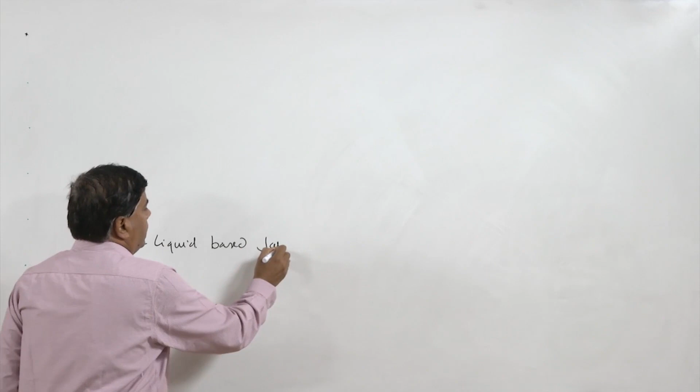In this presentation, I will be talking about basically the two solid liquid based joining processes. These are commonly known as soldering and brazing.

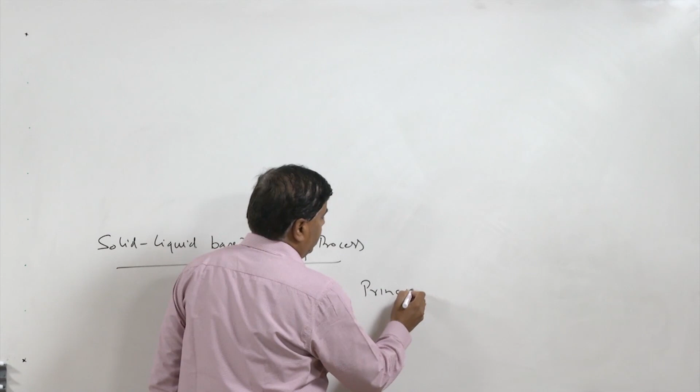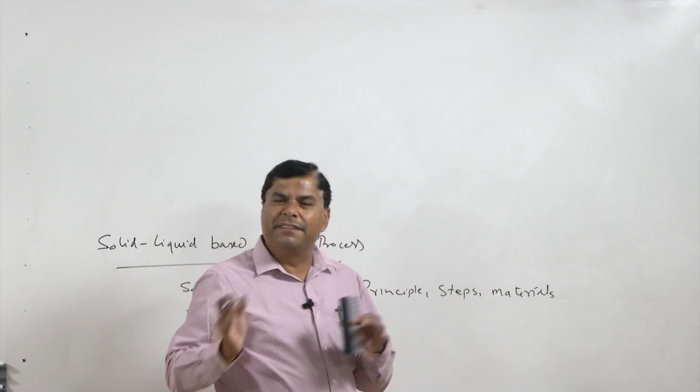Related with these two processes, we will be talking about the basic principle of these processes, steps, the materials which are used like the fillers and the fluxes, thereafter comparison between the two like soldering and brazing, and along with the application of the two processes.

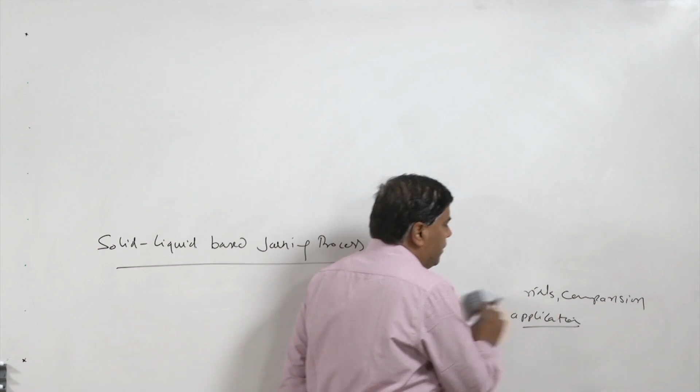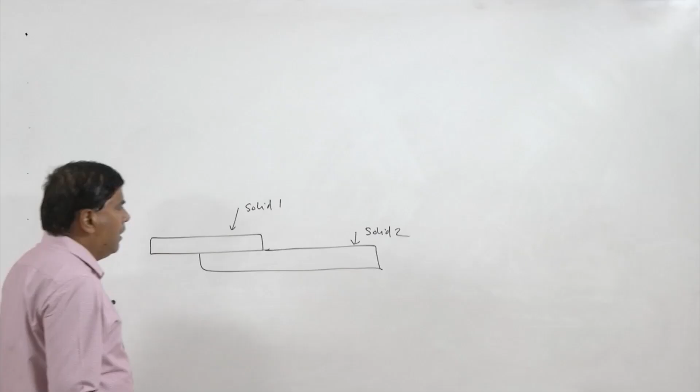As the name suggests, these processes fall in the category of solid liquid based joining processes. Why are these called so? Because the base metals to be joined are kept in solid state, meaning they remain in solid state like solid 1 and solid 2, while the material used for developing the joint between these two is brought to the molten state, which is called either braze material or solder, depending on the kind of process used. So, brazing material or the solder, that is why.

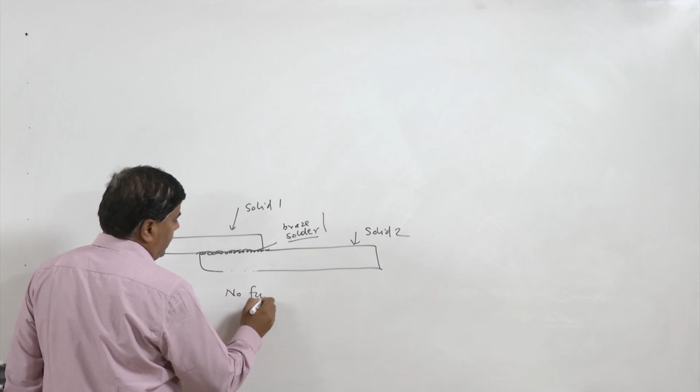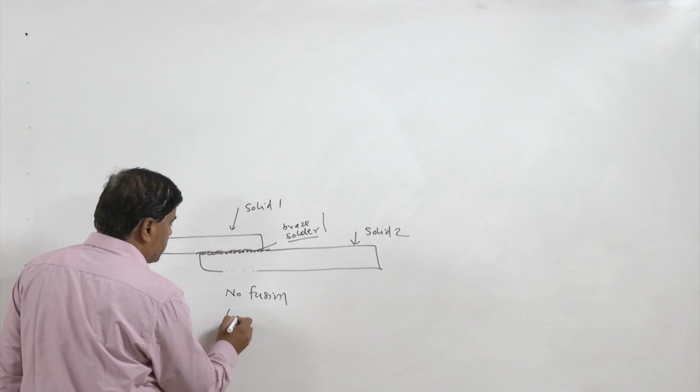In this case only heating is involved, there is no fusion of the base metal, and the heat required for melting the filler metal is also very limited. So, the heat input is low in these processes.

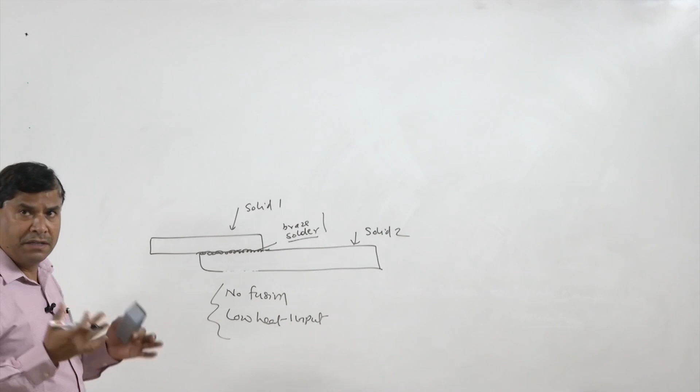These are the two very attractive features, and because of these only, it offers many advantages like absence of fusion and very low heat input requirements for developing the joint between the two systems, and this benefit is exploited in a number of situations.

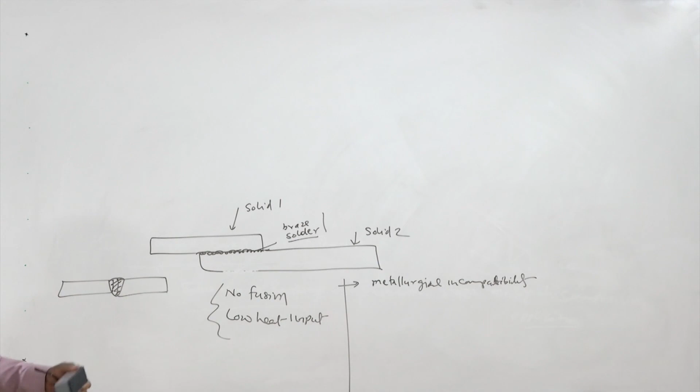For example, for all those cases where components like 1 and 2 have metallurgical incompatibility, if after fusion the two form unfavorable things which lead to the formation of very poor joint strengths, if 1 and 2 are fused together and they are metallurgically incompatible, the kind of joint formed is very poor in terms of strength or ability to sustain the service conditions for long. It will not survive, or it may get cracked or damaged immediately as soon as the joint is developed. So this kind of situation arises wherever the joint is to be made between two systems or components in solid state which are metallurgically incompatible with each other.

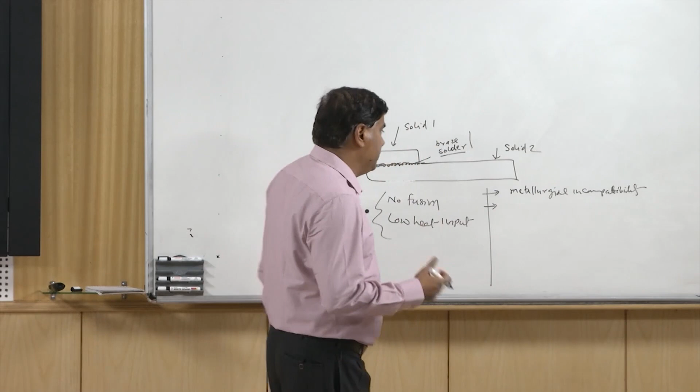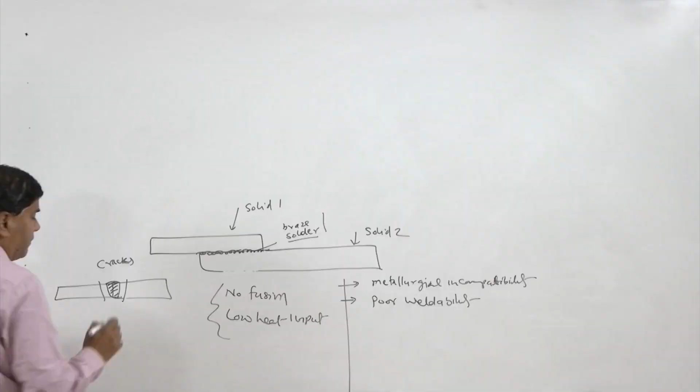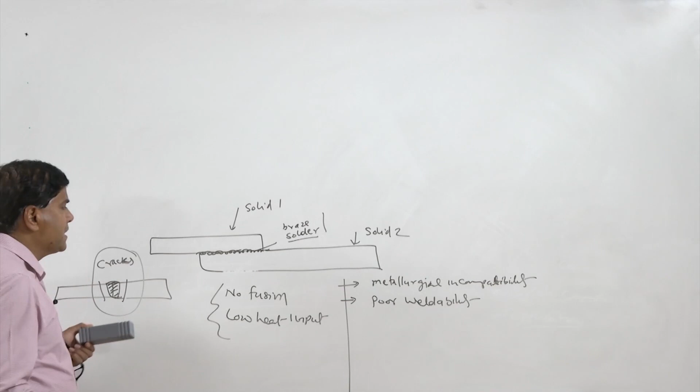Another case is metals which have poor weldability, meaning they can be fused, but the properties obtained are poor. The two components to be joined having poor weldability, when fused, will result in a lot of porosity in the weld or cracks in the weld or in the heat affected zone, which becomes either very soft or very hard. So a lot of welding related issues are involved in joining such metals using fusion welding processes. These are considered as poor weldability metals, and it's better to join them using solid liquid based processes like brazing and soldering.

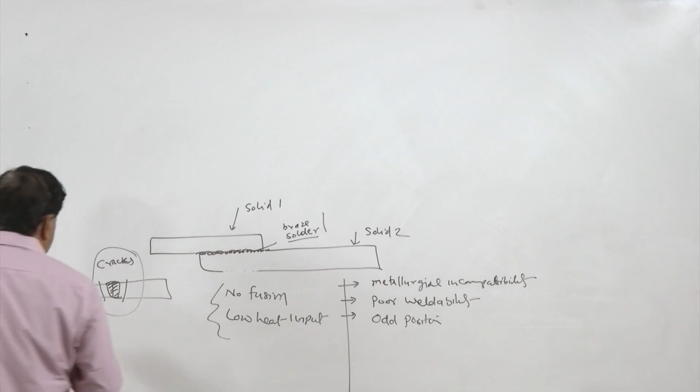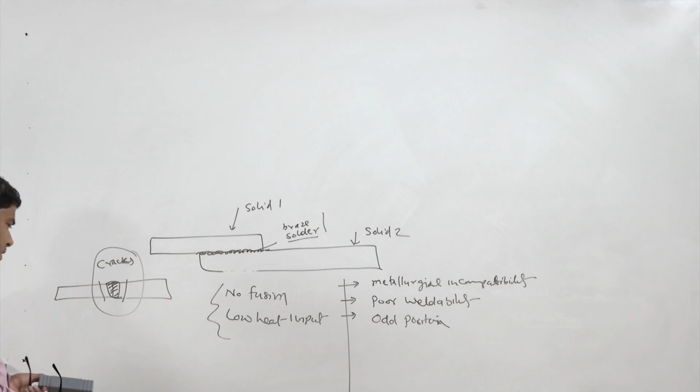Another case is odd position welds. If the molten metal cannot sustain itself during odd position welding, it is always good to make the joint using processes like brazing and soldering, which allow just the heating of the base metal and melting of the filler metal for developing the joint between the components.

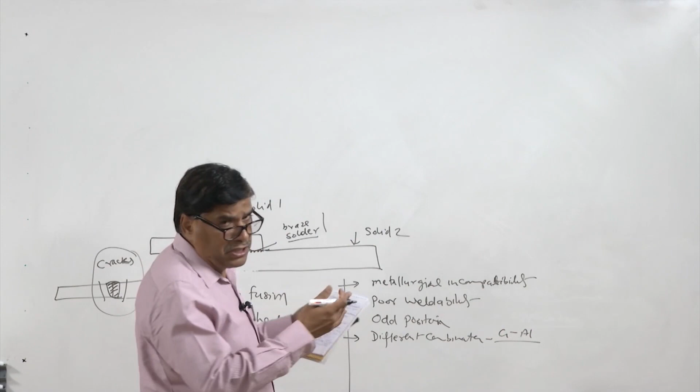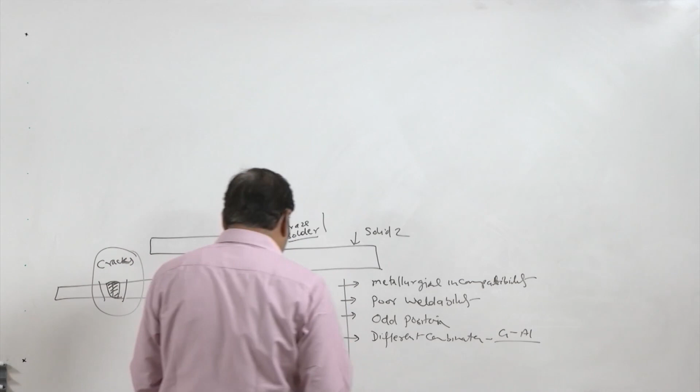Then there is the case where a completely different combination is to be developed, like entirely different materials, for example glass and aluminum, or any other combination where the physical and mechanical characteristics of the two systems are completely different. These can be joined together using brazing and soldering processes.

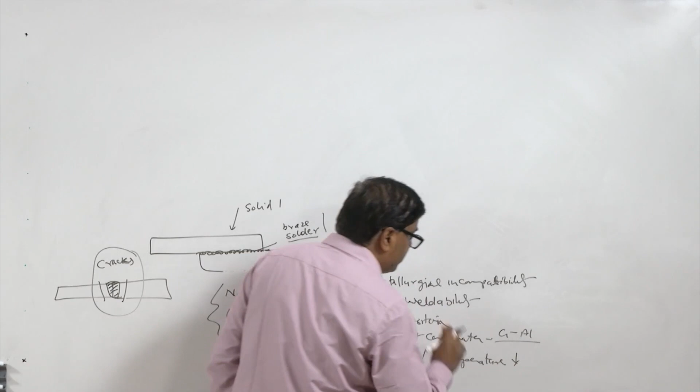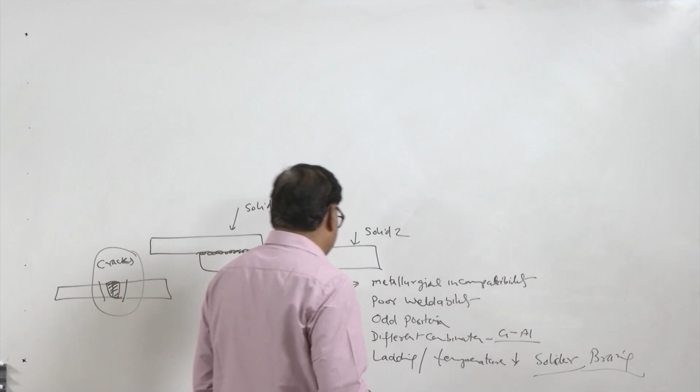Another suitable area is wherever the loading conditions during service, as well as the temperature conditions experienced by the joint, are very limited - there these kinds of joints like solder joints and brazing joints are found to be very useful. These are the benefits exploited due to the unique feature associated with brazing and soldering, that it involves just heating of the base metals and melting of the filler metal for development of the joint. Limited heat input ensures that metallurgically incompatible, poor weldability metals can be joined effectively for development of the joint.

As far as the process principle is concerned, here what we will do with the components - mainly two types of joints are made.

The most common one is the lap joint configuration, and sometimes even butt joint can be made for those cases, but for making the butt joint, beveling is especially tried so that the required joint strength can be achieved.

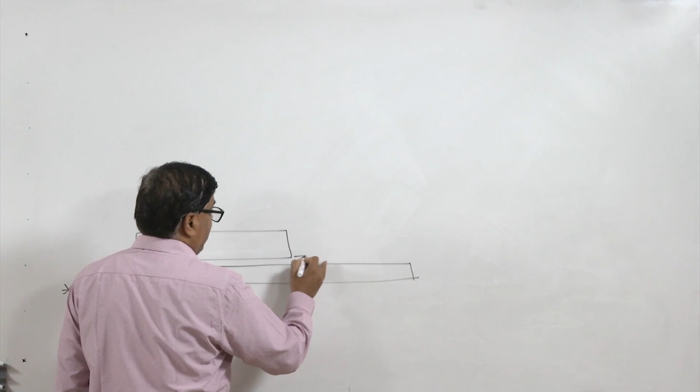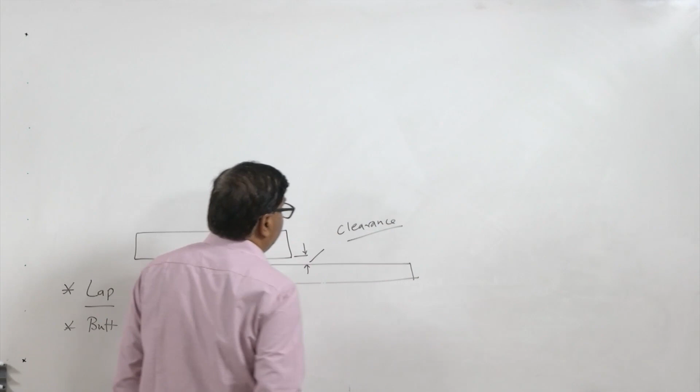As far as the lap joint is concerned, the plates or sheets to be joined are kept in lap joint configuration, and a particular gap between the plates and sheets to be joined is maintained, which is called clearance. This clearance is kept like 0.075 to 0.125 mm.

This gap ensures that whenever the brazing or soldering material is brought to the molten state by application of external heat, this molten solder or brazing material will be sucked inside the gap between the faying surfaces of the components to be joined, by capillary action.

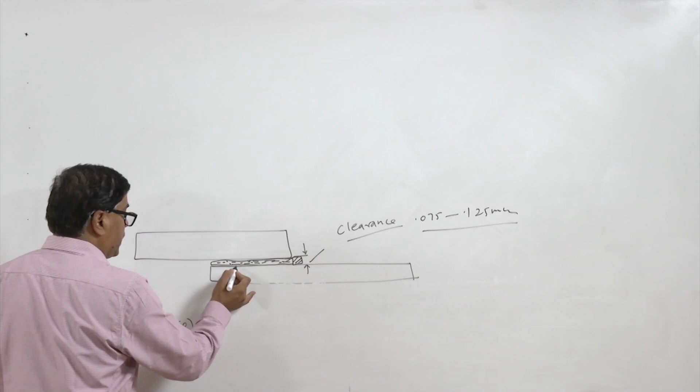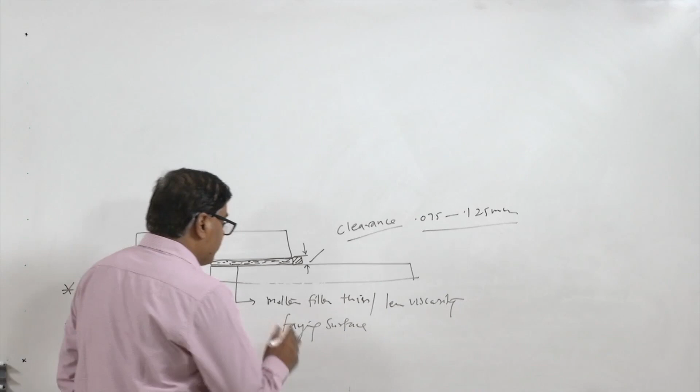Capillary action will be effective only if two conditions are there: one, the molten filler is very thin, of less viscosity; and two, the faying surfaces of the components being joined are clean enough.

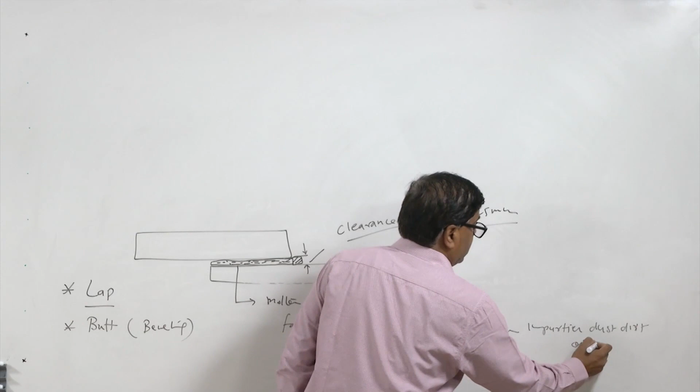These surfaces must be free from impurities like dust, dirt, oil, grease, etc. So proper cleaning of the surfaces to be joined is needed, and the gap is maintained.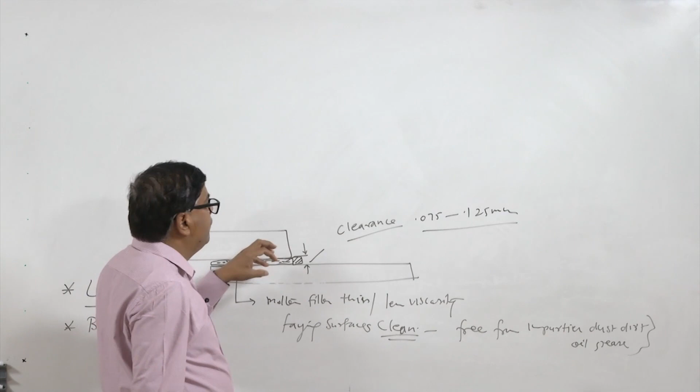Once the plates are prepared properly and the proper gap is maintained, heat is applied. Once it has become hot, the filler metal is applied. The filler metal, either brazing or soldering material, will be brought to the molten state, and it will be sucked in by capillary action between the components.

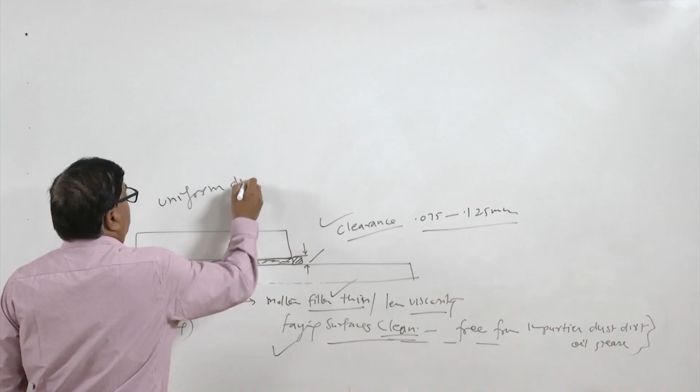It will be sucked in only if it is thin enough and less viscous, with very clean surfaces, and if the proper gap is maintained. So gap, thinness of the material, as well as proper cleaning of the faying surface, are very crucial for uniform distribution of both solder as well as brazing material.

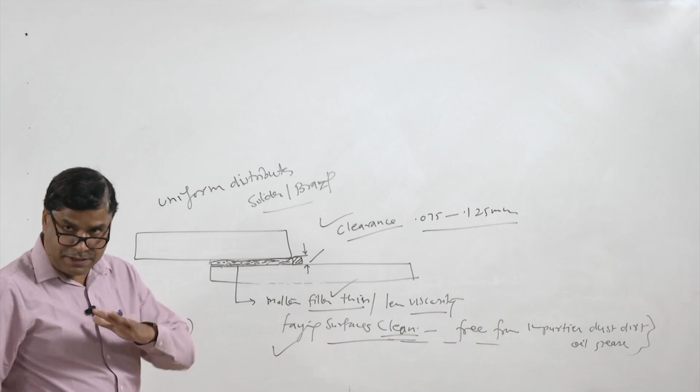If it gets uniformly distributed, then proper joint strength is achieved. If it is left in some places, then that area will remain unjoined and the joint strength will be poor in that case. So proper surface preparation is very crucial for developing good weld joints.

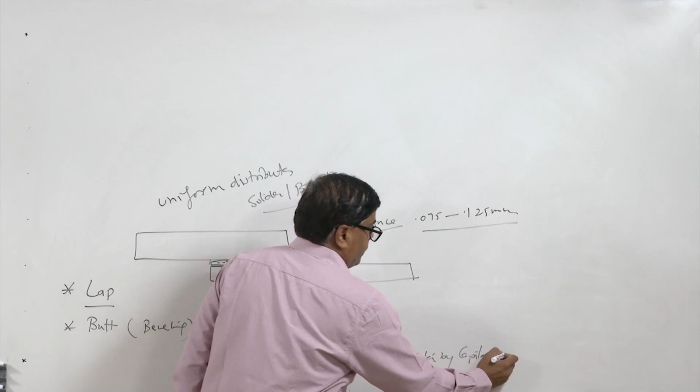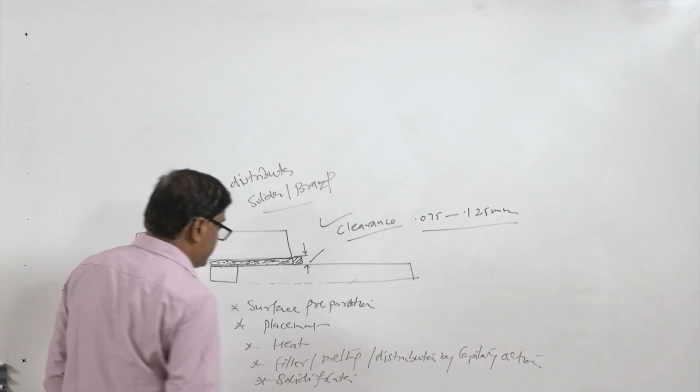As far as the steps are concerned: first, surface preparation with proper cleaning. Second, placement with proper gap. Third, application of heat, then the filler is brought to the molten state and melted, followed by distribution by capillary action, and followed by solidification. Once solidification is completed, the joint is ready.

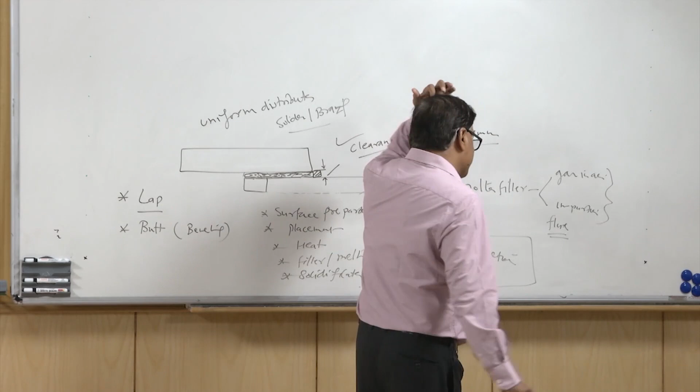But despite proper cleaning, some impurities are left on the surfaces, and the molten filler will be able to interact with the gases in air or impurities present on the surface. These two things must be taken care of, and for that purpose, to deal with impurities and compounds formed by reaction between the filler and atmospheric gases, like oxides, fluxes are used.

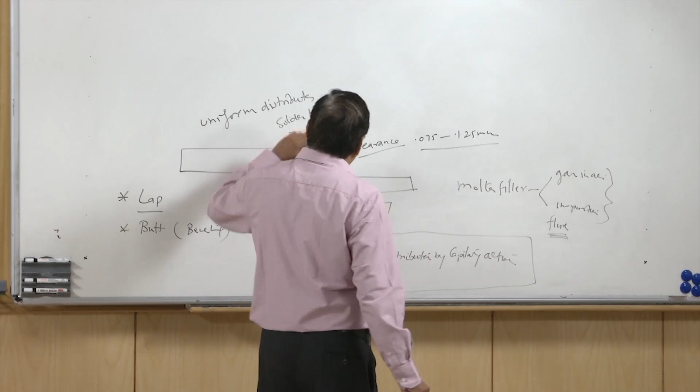Fluxes are applied or placed beforehand when the filler metal is placed, so that the flux also melts along with the filler metal and works effectively in a number of ways. The flux is applied in form of paste or powder.

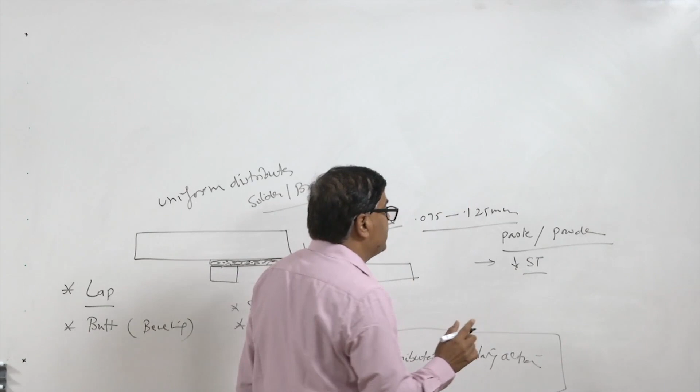After melting, the flux does a number of things: it lowers the surface tension of the filler metal, it avoids oxidation of the filler, and so surface tension is reduced.

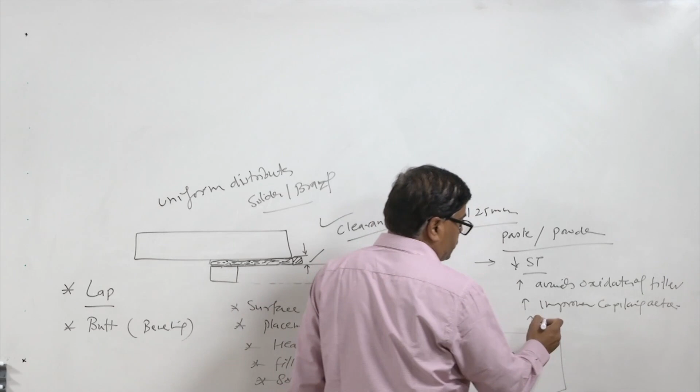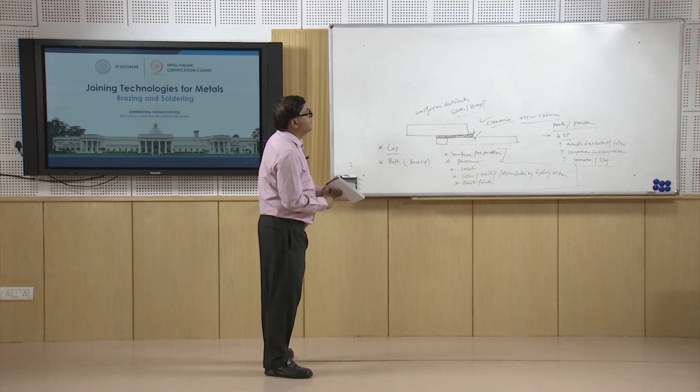It helps improve the capillary action for better distribution, and the flux also interacts with the impurities to form slag. The flux reacts with the impurities to form slag, and this slag, being lighter, is removed from the surface.

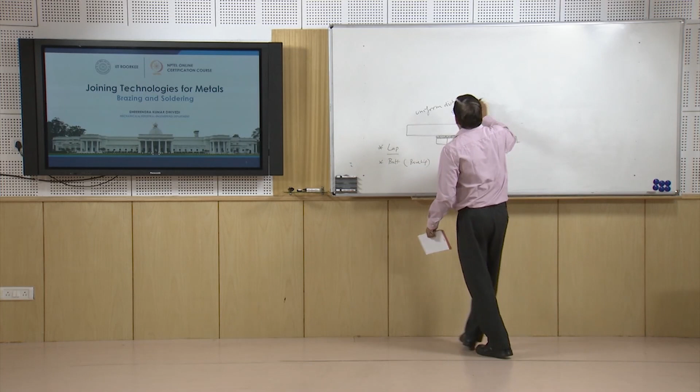So this is about the lap joint configuration. We know that if the butt joint is to be made for a particular application, then special arrangements must be made in order to achieve the desired joint strength.

For example, if this is the sheet to be joined in a simple butt joint configuration, this area will be very less in order to offer the joint strength. So in such a situation, beveling of the surfaces is normally carried out.

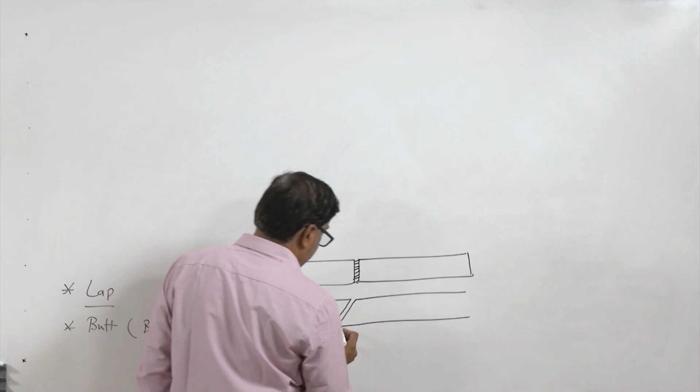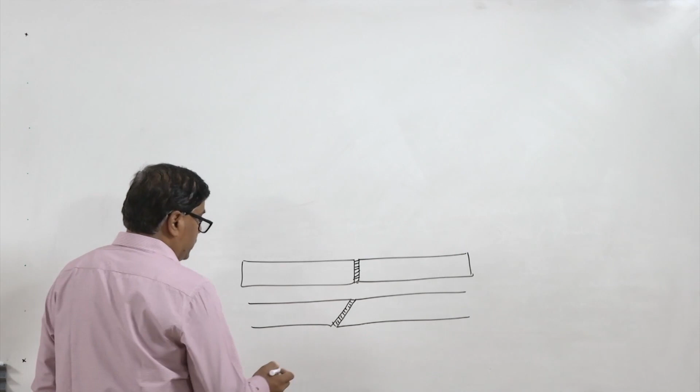So the surface area increases, and the filler is placed between the fixed surfaces for developing the brazed or soldered joints. Alternatively, another kind of configuration can be made wherein the opposite corresponding surfaces are arranged so that the brazed or filler joint can be placed between them. So these butt joint configurations will be able to carry the tensile load as well.

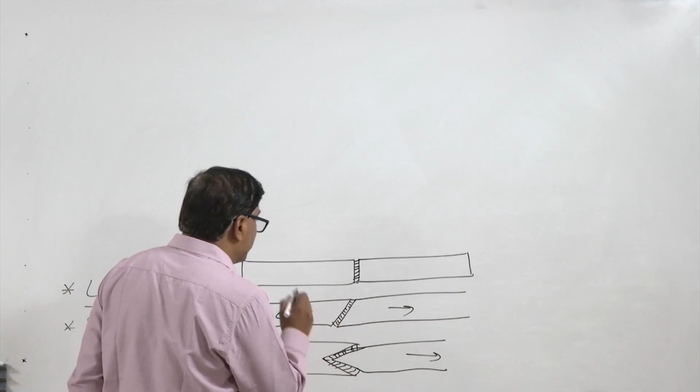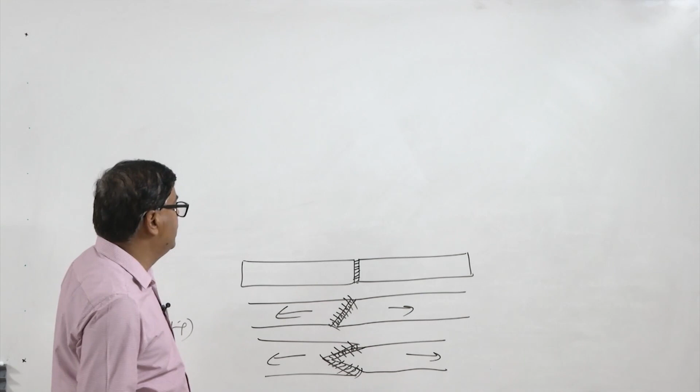So in order to increase the joint area, single or double beveling arrangements can be made, so that the load carrying capacity of the joint can be increased.

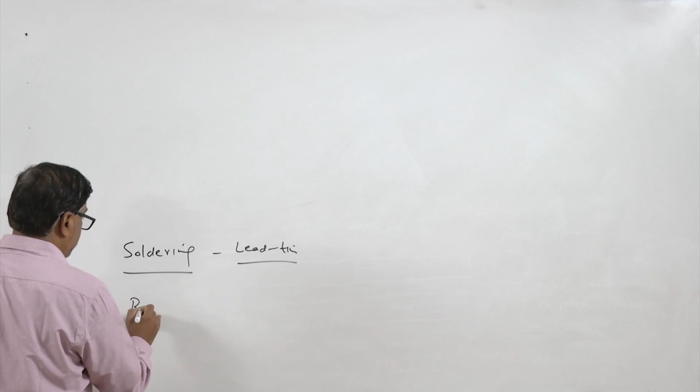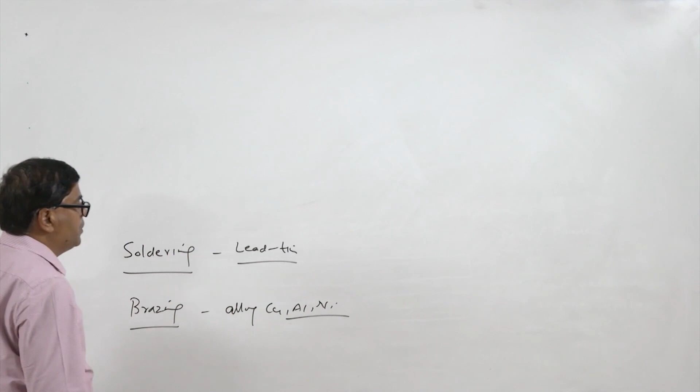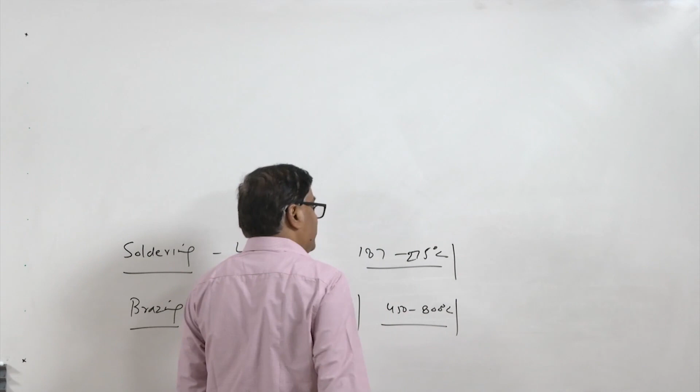Now there are various points based on which we can compare brazing and solder joints. For solder joints, soldering is performed using lead and tin based alloys, while for the brazing purpose alloys of copper, aluminum and nickel systems are used. These systems melt at a higher temperature, say 450 to 800 degrees centigrade, while soldering is used for lower temperature conditions like 187 to 275 degrees centigrade. So lead and tin are the low temperature systems used for solder, melting at very low temperature, while brazing alloys melt at very high temperature. So for brazing we definitely need higher heat input as compared to soldering, which requires low heat input because of the difference in melting point.

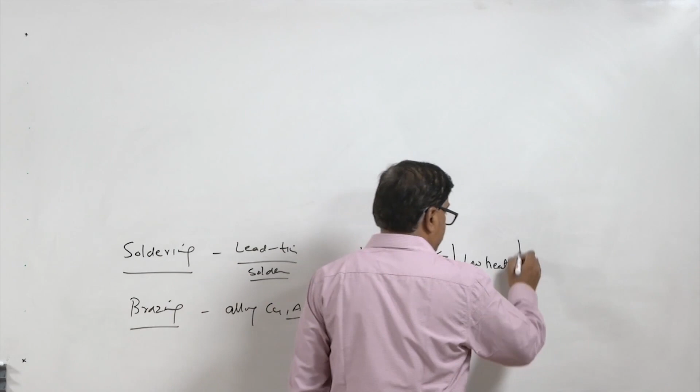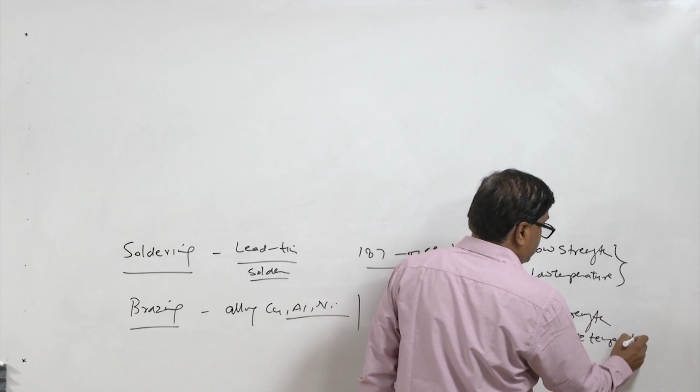And since solders have a low melting point, they offer very low strength as well as low temperature tolerance capability, meaning they cannot work at higher temperature. With increase in temperature they get soft and strength is reduced, so the joint load carrying capability is adversely affected. So these are good for low load service conditions at low temperature, while brazed joints offer high strength and can work under reasonably moderate temperature service conditions. So these are used for developing joints for tubes or carbide

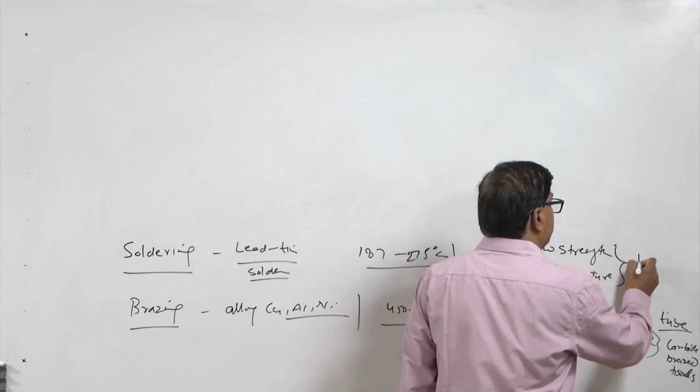brazed tools, and solders are mainly used for electronic applications, where the joint is primarily made for the flow of current, not for carrying load. So solders are primarily used for electronic applications, while brazing joints are used where moderately higher load carrying capacity is required, or higher service temperature conditions need to be sustained. So these are some of the comparison points.

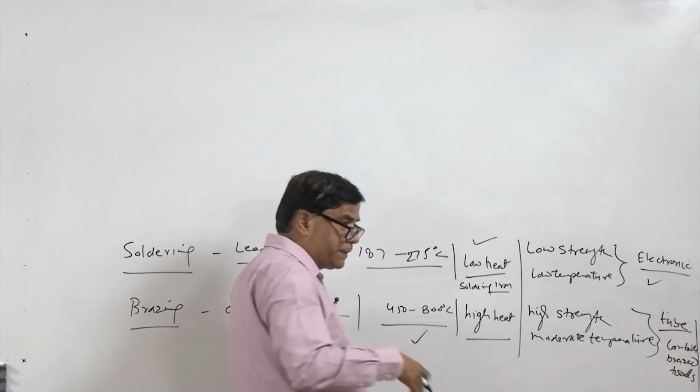Apart from this, another point of comparison is the heat source. Based on heat source requirement, a very light heat source like a soldering iron is sufficient for soldering, because very limited heat is required for developing those joints, but a much larger amount of heat is needed for the brazing purpose. So we need special sources of heat, maybe like the gas flame or induction brazing.

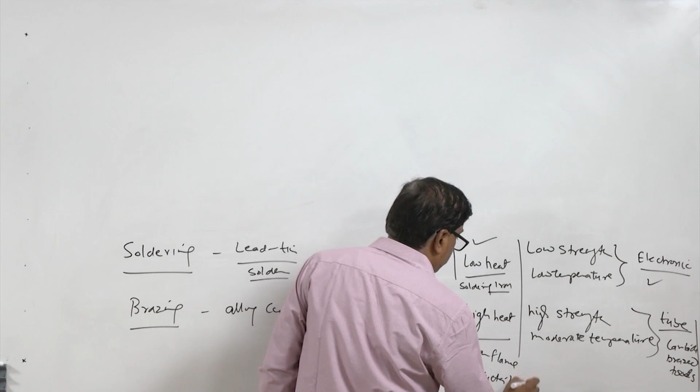There are various brazing methods, by which heat can be applied at the faying surfaces so that the brazing material can be brought to the molten state. Similarly, different sources of heat can be used for the soldering purpose, and according to the method used for application of heat, either for brazing or soldering, the methods are described accordingly. I will talk about some of these methods, along with the filler materials used for brazing as well as soldering.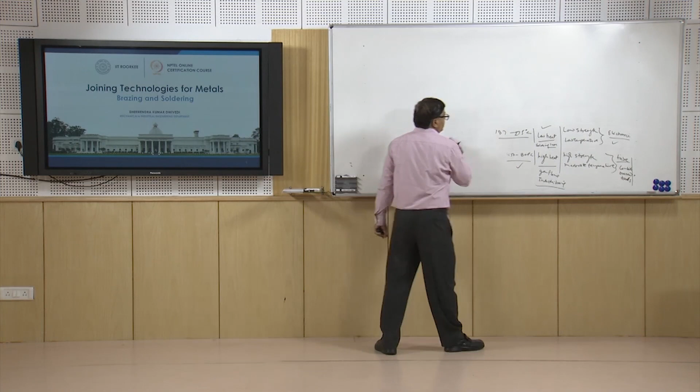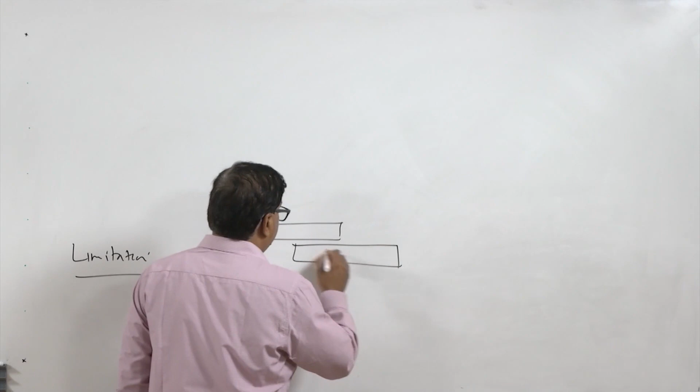Now, in addition to this comparison, there are certain negatives also related with these processes, and these negative aspects primarily include the inherent features related with these two processes. The first limitation is that the base metals are kept intact in the solid state while the filler is brought to the molten state. So the strength of the joint is always lower than the base metal strength. So limited strength is one weakness of the brazing and soldering processes.

Another limitation is that they cannot sustain higher temperatures, so they are good for moderate and low temperature conditions only.

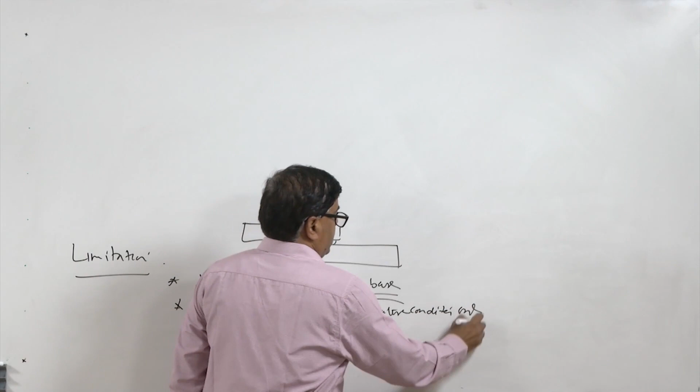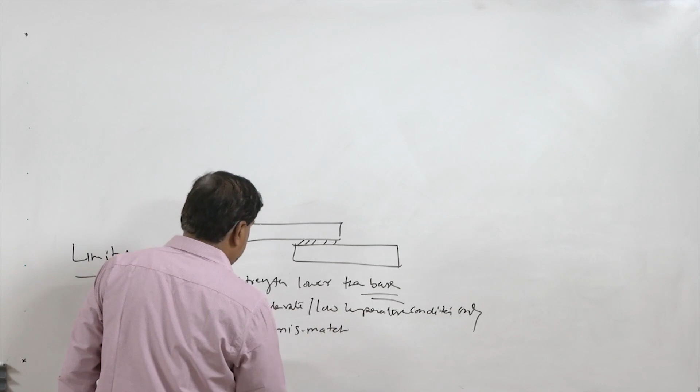They cannot sustain the higher temperature. Sometimes the brazing and filler material, the solder and brazing materials, become of different colors, so there is a color mismatch in the braze and solder joint. This is another problem because it adversely affects the appearance value of the joint, and sometimes the dissimilar metals promote corrosion.

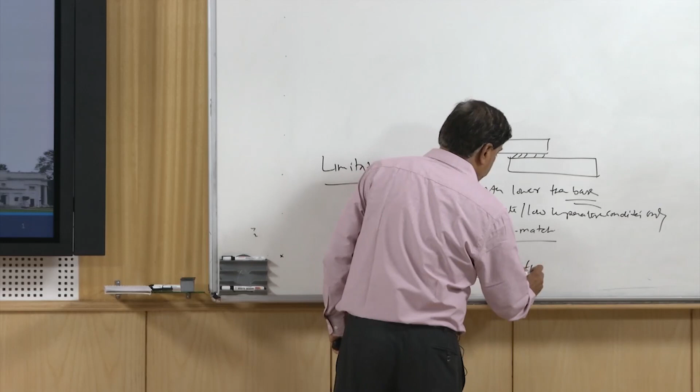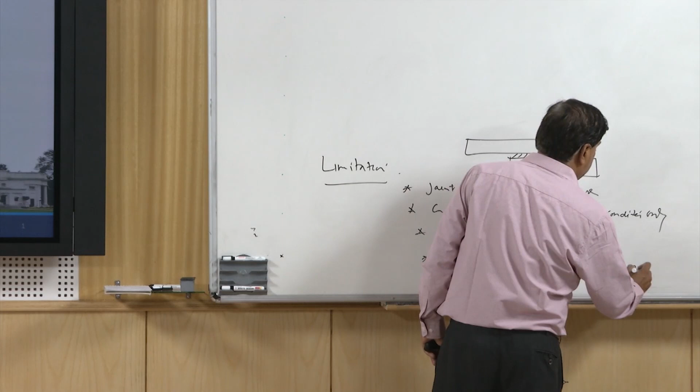Additionally, it becomes important to clean all fluxes that have been used. Fluxes like borax and boric acid are commonly used, and these must be cleaned after soldering or brazing. If they are not cleaned properly, because they are corrosive in nature, they will promote corrosion of the joints as well as of the base metal. So it is important that the fluxes, after application, are cleaned and removed properly after developing the joint.

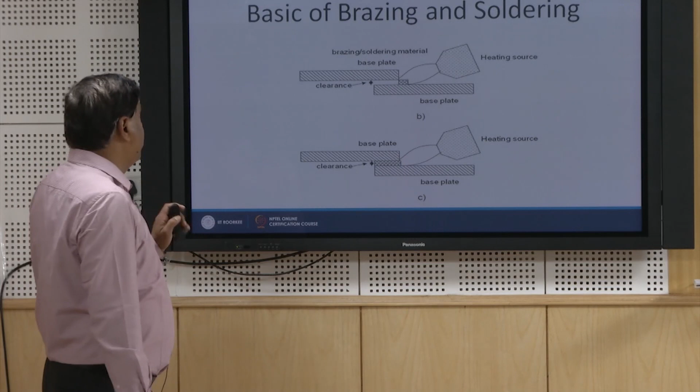Now we will see some specific metal systems used for developing weld joints, as well as the kind of arrangements used for brazing and soldering. The plates are kept like this with a certain gap, and the heat source is applied, and thereafter the flux and the filler are placed. Once it is brought to molten state, the filler spreads between the faying surfaces, and after solidification it results in formation of the joint.

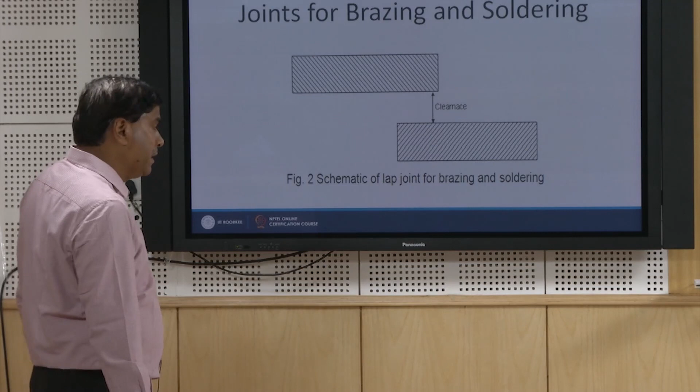The clearance is extremely important for having the capillary action, in order to ensure uniform distribution of the filler material between the faying surfaces. Preparation of the plates is important to make them free from impurities so that proper capillary action can be ensured, and for making butt joints, some edge preparation is important to increase the contact area between the plates to be joined, so that the joint can be made with sufficient strength.

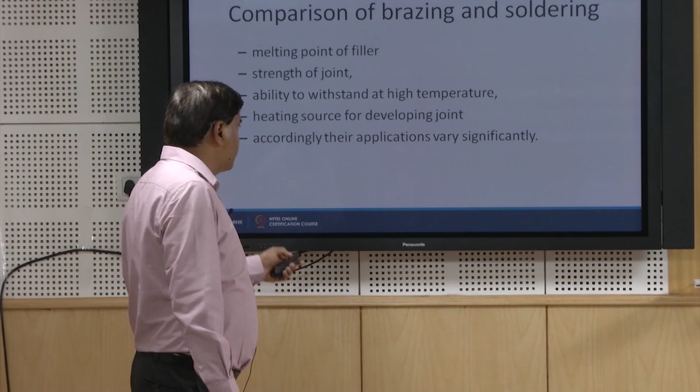These are the different points based on which brazing and soldering can be compared: melting point of filler is lower for soldering than for brazing; strength of the braze joint is much higher than that of the solder joint; ability to withstand high temperature is better for brazing joints as compared to soldering joints; and heat source requirement, meaning a higher capacity heat source is needed for brazing compared to soldering. According to their load carrying capacity or ability to sustain higher temperature, these two processes find applications in different areas.

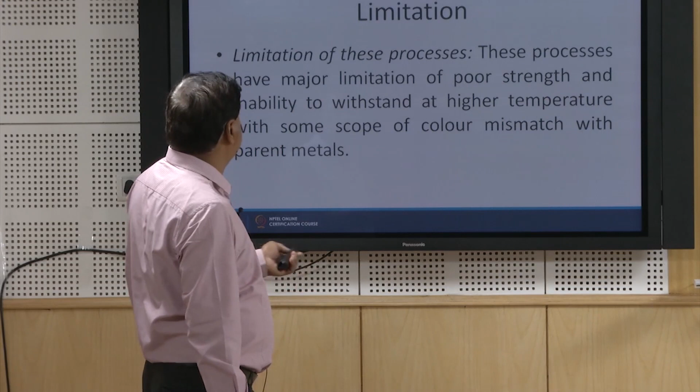So this is just for comparison purposes. Limitations of these processes are poor strength, inability to withstand high temperature, and sometimes color mismatch is another problem encountered.

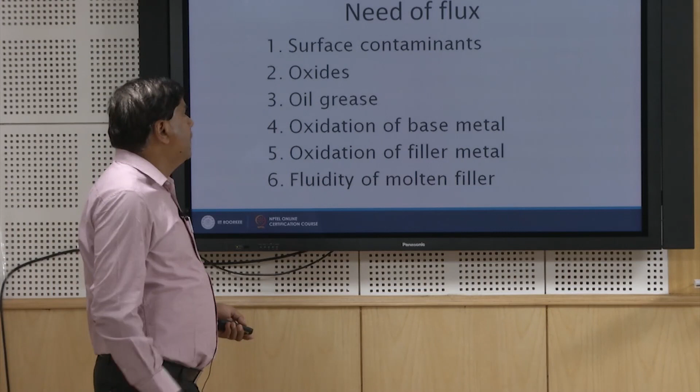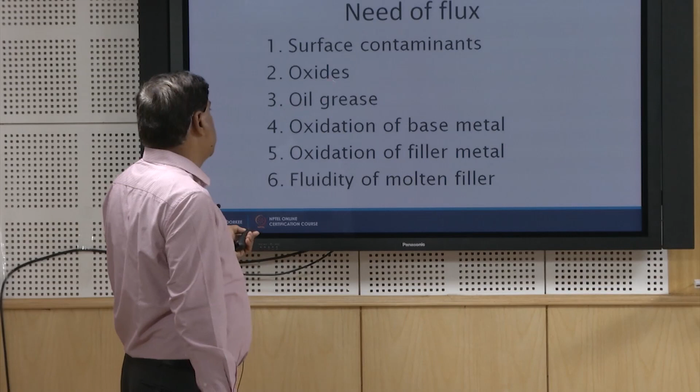These are the different purposes for which fluxes are used. They take care of surface contaminants, oxides, oils and greases, oxidation of the base metal, oxidation of the filler, and fluidity of the molten filler. All the oxidation, grease, oxides and contaminants are taken care of, while fluidity is improved by the flux. The fluxes help dissolve oxides from the faying surfaces, reduce surface tension to improve fluidity, and protect the base metal and molten filler from oxidation during the joining operation.

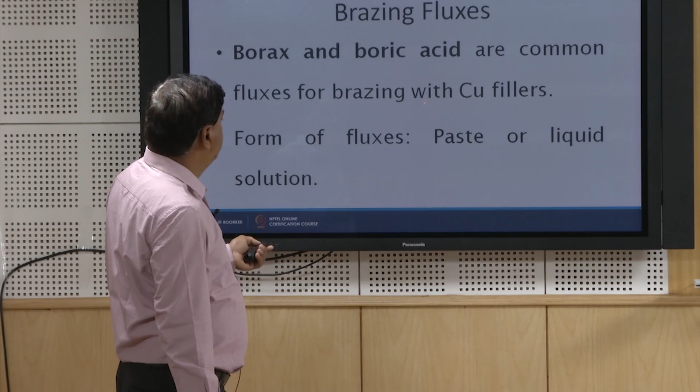The common fluxes used are borax and boric acid, commonly used with brazing, for brazing purposes with copper fillers, and these fluxes can be used in the form of pastes, solutions, or powders, applied over the surface.

Now here I will conclude the presentation. In this presentation, I have basically talked about the basic principle of solid-liquid based processes like brazing and soldering, the conditions under which these processes can be used effectively, and the kind of material systems used for brazing operations. Thank you for your attention.